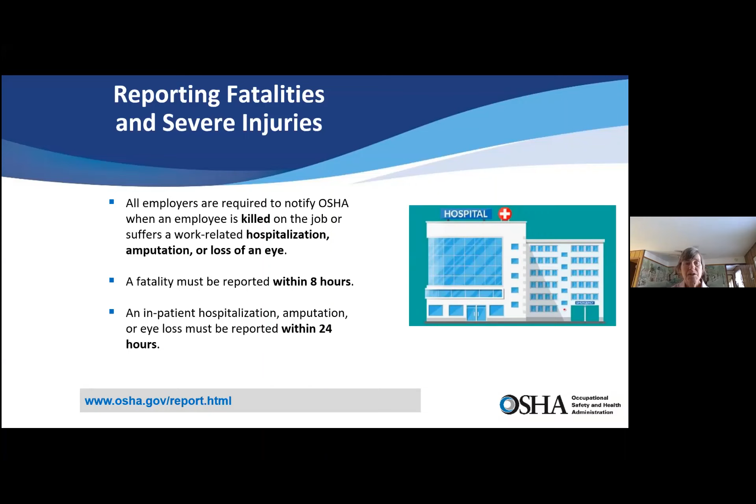...you have to report that, pick up the phone or fill out the online form, but you have to tell OSHA. The timeline is 8 hours on a fatality, 24 hours on a hospitalization, amputation, or loss of an eye.

You can do that during normal business hours by calling your local OSHA office. We also have a 24/7, 365 hotline that you can call, and they would direct it to the appropriate office.

Or you can do it online, which would give you a time and date confirmation that you reported it within the appropriate amount of time.

We are quite serious about the timeline, and it does expire.

I took a concern yesterday where an employee passed away in October of 2020, and the family member was wondering whether that was ever reported. So we do need to keep these things timely.

One of the things we look at when we talk about getting to inspections, besides the reported accidents, is what we call a referral.

This can come from local county or state inspectors if they're out on a site and they see employees exposed to a hazard.

Obviously not your most trusted source, but a company was doing an expansion and was really proud of their expansion work, so they took a picture of the contractor.

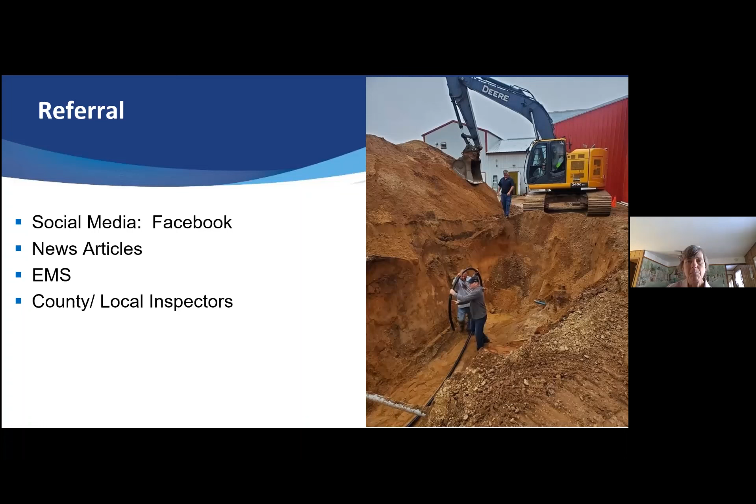So there's a number of things we would have looked at had we done the inspection, but we did address it in some manner by making the employer aware that we know they need to be doing a better job, even though because it was after the fact, we can't cite off of other people's photos. Not to give you secrets on how to get away from an OSHA inspection, but if somebody's out taking photos and everybody's got cameras, that is something to be concerned about or aware of.

So how we get to sites, first thing is an imminent danger. This trenching emphasis program, our agency priority goal, has elevated trenching to the point of if we see a dirt pile, we'll stop. You can have the trench box, have your spoil pile under control, everything else, we'll still stop. If it is all under control, we say, thanks, have a great day, appreciate your compliance, and we walk away. If it's not in compliance, then the inspection would be initiated.

Other imminent dangers would be if you had people on the roadway without proper road markings, so your traffic control isn't adequate to protect the employees. If you had people in fall distance, so typically in the imminent danger, if we see somebody on a roof without fall protection, that's where we would stop. But in trenching, if we see a dirt pile, we'll stop.

Our second priority would be the fatalities or the report of serious injuries. So this is after something happened. That's why we try to get there before, in the imminent danger. If we get a reported case, then we will go out, and that's prioritized over an employee complaint or a referral.

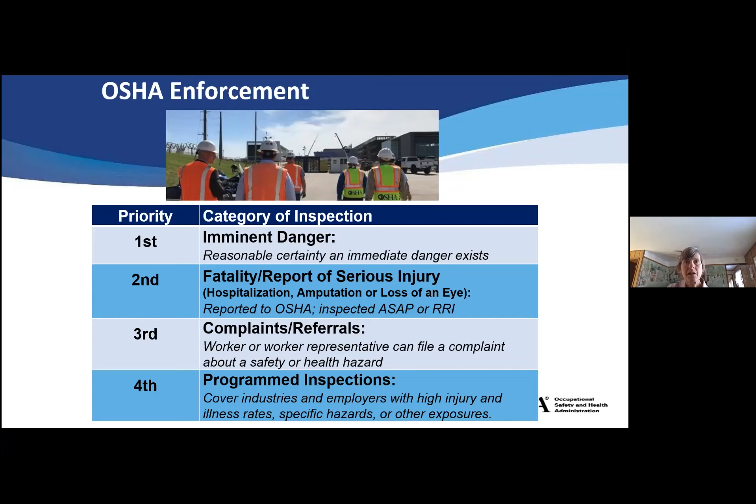We do programmed inspections, and so for construction, that would be larger projects that have some sort of duration, more than a dig a trench, put a water line in, and walk away. So those would be hospitals, schools, big utility projects that are let bid, usually government contracts.

So what we do once an inspection is initiated is present credentials to the employer. And if you have a lead person on site, they are acting as the employer. They're directing activity. Therefore, we consider them an extension of the employer, even though they don't own the company. So if you do have someone who's in charge of your crew, and you do have an OSHA inspection, just kind of let them know how you would like them to handle it.

Usually, we do not have the ability to wait, but they could call you and get you to the site if you're out bidding jobs or doing something else. But we do need to initiate the inspection. And once we initiate the inspection, we need to keep proceeding. So we do have credentials. If you suspect that the person's false, not really with OSHA, you can always call the area office.

We have what's called an opening conference. We discuss the parameters of the inspection, which would be the reason why we're there. We have to have a reason. If anybody deals with MSHA, they have the ability to just stop at a site and do an inspection. We have to have a reason, and we'll tell you what the scope is. And generally, these sites are everything we see, everything that's there. If we were in a major manufacturing facility, we may limit it to one department, depending on the complaint item or the reason why we're there.

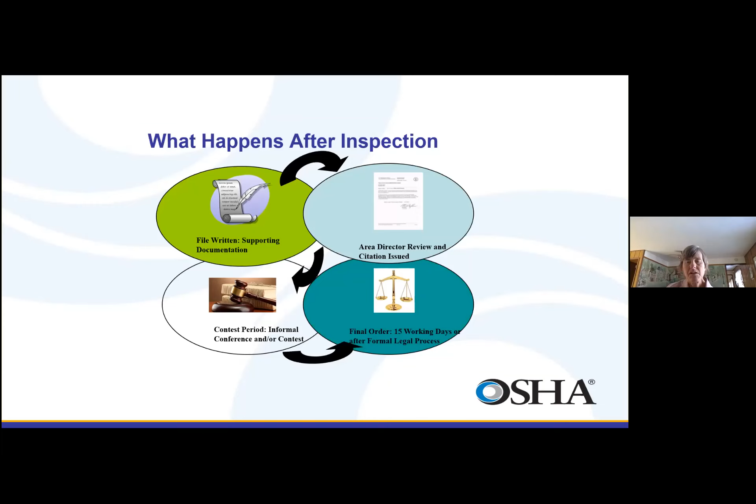But here's one of the sticklers in what's happening in the OSHA world: we're 50 years old. We had one penalty adjustment in the 90s, and the second time we adjusted penalties was 2016. The 2016 adjustment said we shouldn't go that long between adjusting. We'll just have the penalties adjusted for inflation. So it could technically go down, but with the inflation rate, especially at the end of 2021, the penalties went up $849. And typically they've been right around $150, $200 every year. They've been inching up. It took a big leap. So in 2023, that's going to be a huge number. And those are per item or per violation, depending on the category.

A lot of construction companies, a lot of people that have a lot of visibility are really concerned about the repeated classification. And a repeated violation is a standard that's been violated within the past 5 years. So if you think of your driving history in 3 years and you go, oh my God, when's that ticket going to drop off? You have 5 years for that item to be available as a basis of a repeated violation. And that $145,000 is a very significant number.

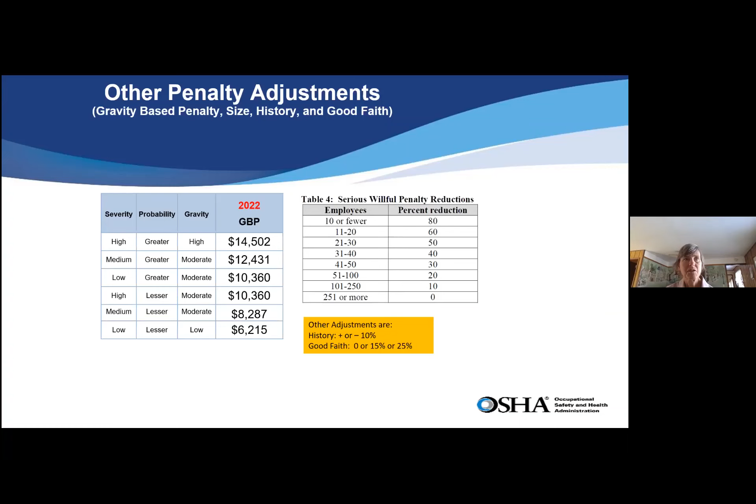So the penalties have gotten significant enough where I think people are understanding that sometimes it's better to take a step back and reconsider what you're doing, because for $14,000, you could probably wait until the next day until things get sorted out on what would be the safer way to proceed.

One thing OSHA can do is called the multi-employer worksite policy. So we have utilized this quite a bit. If you do a large job and it has a general contractor, they will ensure that whatever you do is done safely, because they could get cited for it. So they'll point out things that you need to be doing better and not exposing the whole group to.

The city, county, if you're a county inspector, your group that controls your safety is the Department of Safety and Professional Services, and they do have a group that does inspections for your entity. So you could be exposed to a trench that somebody else dug, and if you got buried in that trench, OSHA wouldn't have jurisdiction. It would be DSPS.

So there is a division there, but you do have people that you can call and talk with, try to get the program together and means and methods of acting safely. The other thing that you can do is you can submit a referral to the OSHA office on the contractor if there are issues. So where we've used the multi-employer worksite policy, this was a number of years ago up in Elmina, up in my area.

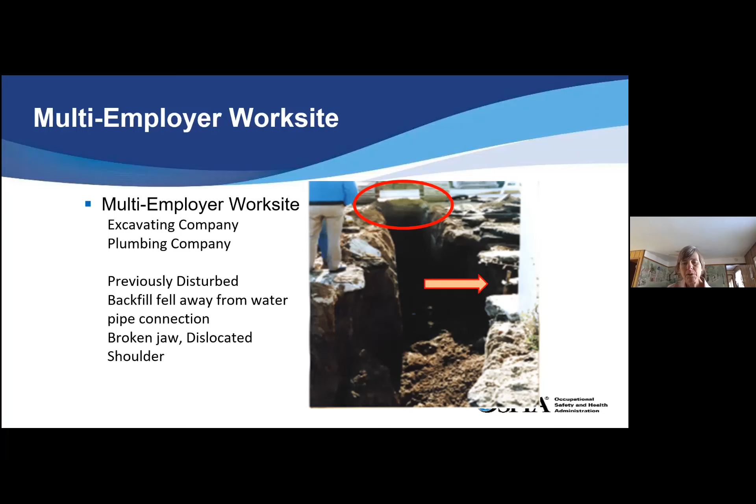We did cite the excavating operator and company, and then the plumbing company for that, because one created, the other caused. So I know a lot in the way my dad's business ran is, he didn't have an excavator, so he was relying on the digger to be doing their job, and sometimes talked about putting up with stuff that he didn't care for. But you have to have that working relationship with your excavating contractor of what you're going to accept.

We used to have an office in downtown Eau Claire. We got the best photos. I was just across the street, riding buckets, doing stuff like that. If that's a plumbing contractor and that's the excavating company that's allowing him to ride the bucket out, there would be 2 violations there.

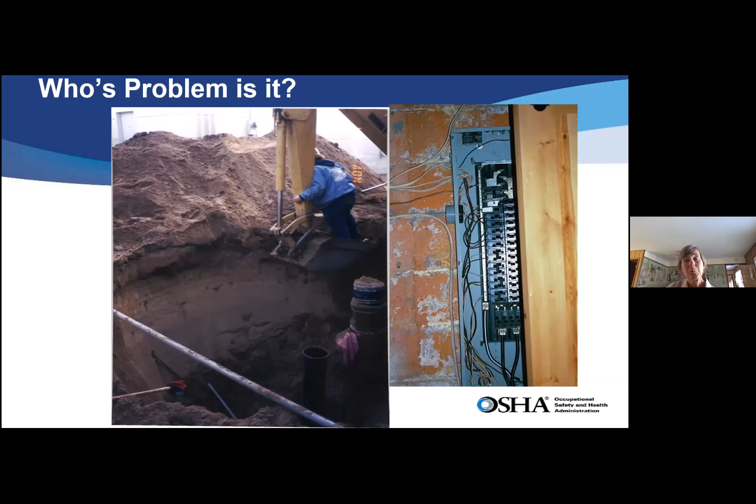A lot of times in regular construction, we see the electrical boxes open and they're energized. So to imagine, I opened that door and was like, that's live.

So we can cite who created the problem, who has exposed employees to the problem, who is supposed to correct it, and who has oversight. That has cleaned up a lot of the construction industry quite a bit.

Okay, getting to the trenching itself. There's a lot of posters, there's a lot of initiatives out there, but when you put machines on the edge of that trench, you're creating a mini earthquake. All that vibration, all that movement is adding to the stress of that wall. The spoil pile needs to be 2 feet back. Any trench deeper than 5 feet needs to have some sort of protective measure.

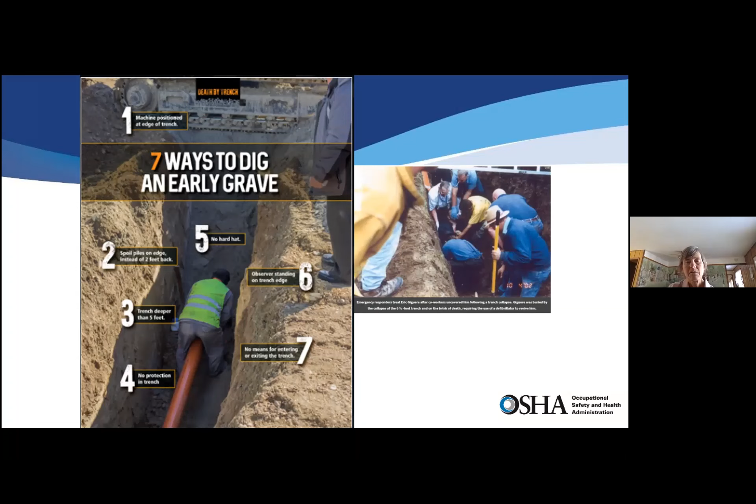And no hard hat on there. An observer, that's probably not the biggest thing, but if that wall gives way, they're gone. And then they need a means of getting in and out of the trench. Often what happens on the rescue side is they're usually recoveries rather than rescues, and you can YouTube a number of things and see people trying to dig people out with the excavator bucket. You just cringe if somebody's buried. It puts rescue groups into a very difficult position.

The other thing we look at in trenching excavation, it's not so much unless you're doing pit work, but you can have a hazardous atmosphere in which you could be overcome by the gases. We had 4 people overcome in a pit in 2007 in Superior. It was a landfill leachate pit. Guys had been working in there for several hours, and then one guy collapsed, his brother went in, and then somebody else went in, and the 4th guy told the 5th guy to go call 911, and he went in and he didn't make it out either. So we want to make sure we look at.

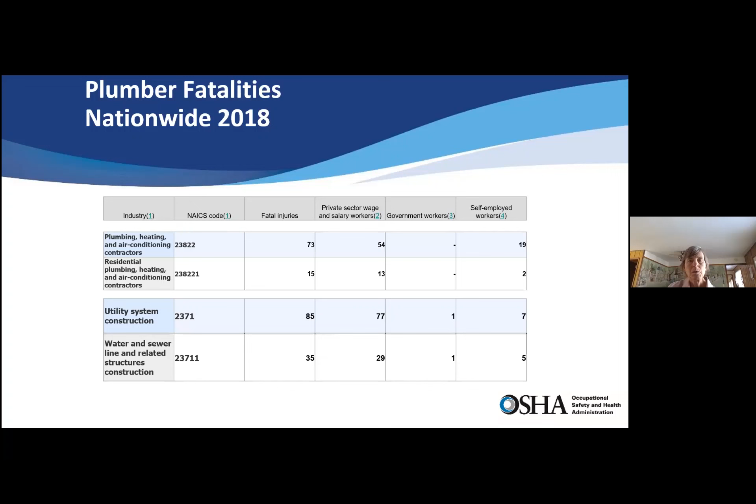Hazardous atmospheres - so I didn't update this one, but it just shows that plumbing contractors, there's a number of utility fatalities that do occur, and it's something to be aware of quite a bit. Self-employed is another number they track, and if you're a small business or your own entity, it is very possible to get killed in your own work or your own trench.

Okay, so for the things that we do cite, again, imminent danger and things we see from the roadside create a lot of the stops or inspections for construction. So we see people on the edge of the roof. We can't see if they don't have a ground pin on their extension cord from the roadside. So fall protection is always going to be on this top list. Eye and face protection, get your hard hats. But number 8 is the trenching issues and concerns.

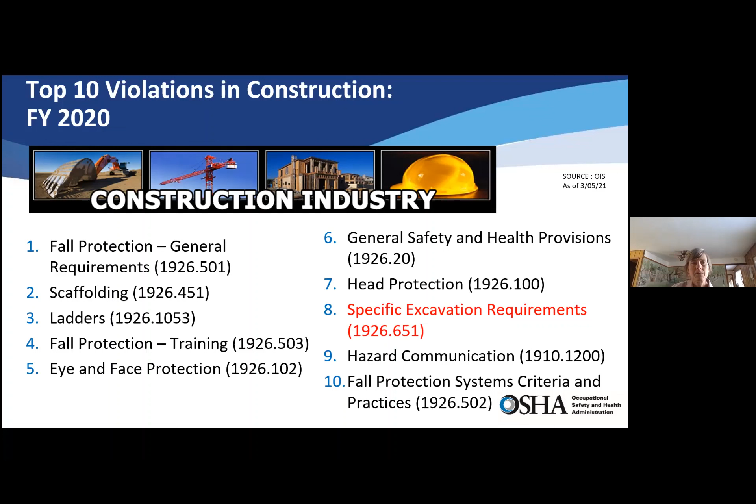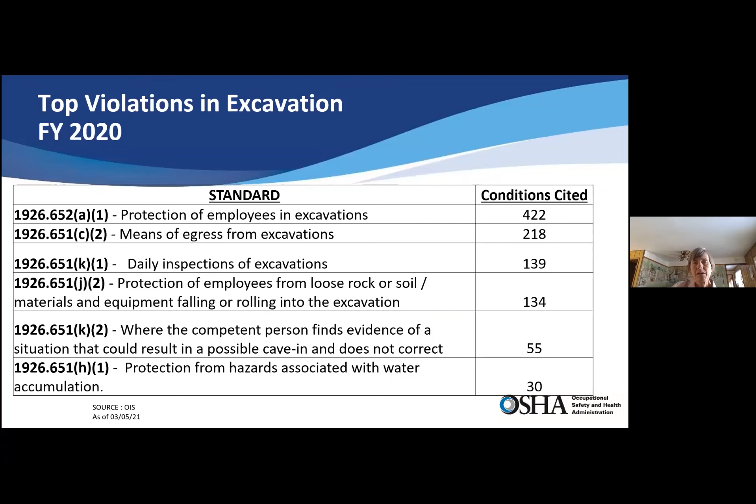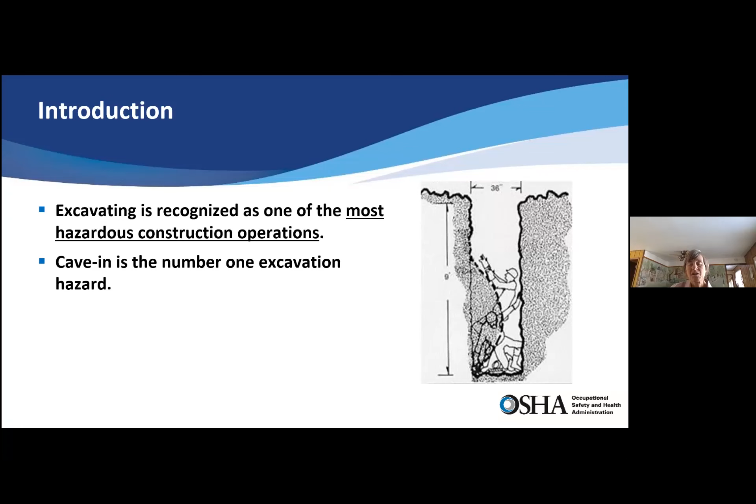So when we look at each specific trenching violation, it's protection, not having adequate protection, not having a means of egress in and out, not having daily inspections - that's your competent person - the 2 feet around for the spoil pile, another competent person variation, and then protecting from water. So it is cited quite a bit throughout the nation, and it is something we are looking at. It's one of the most hazardous construction operations, and cave-ins are the number 1 cause of the issue.

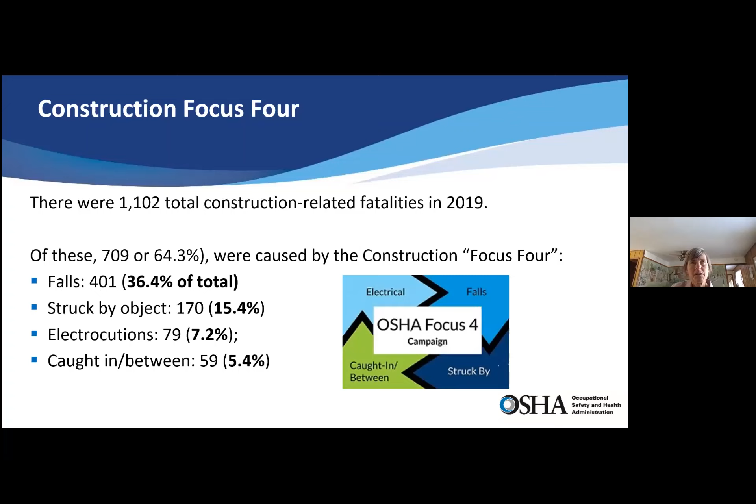So something that we think about in construction is what we call the focus 4. These 4 items contribute to nearly all of the fatalities or serious injuries: falls, struck by, electrical, and caught in between. So when a trench wall collapses, we call that caught in between the trench walls. And struck by could be hit by the excavator's counterweight.

I don't do videos when I do virtual because it's a curse of death, but this is something - for some reason somebody was videoing this, and they were clamshelling out the area, getting below the concrete ring, and the guy in the pink shirt - when they removed the soil, the replacement soil came from underneath his feet, and he got sucked down in there. The guy in the gray shirt grabbed onto the clamshell, and that's what saved him. But the guy in the pink shirt didn't make it out of there.

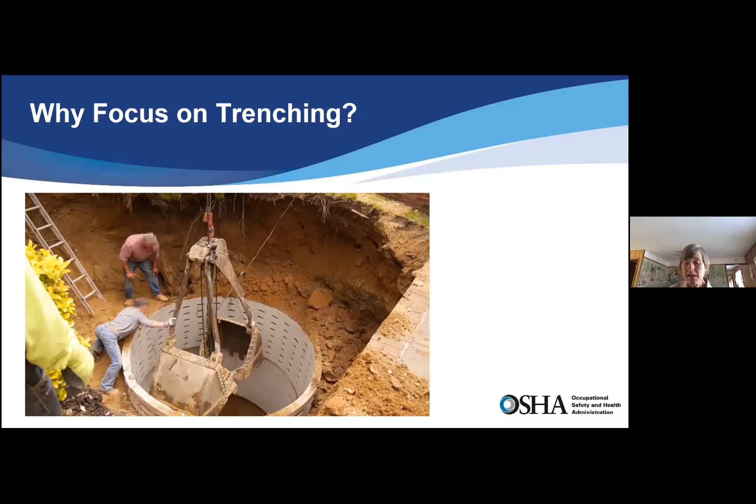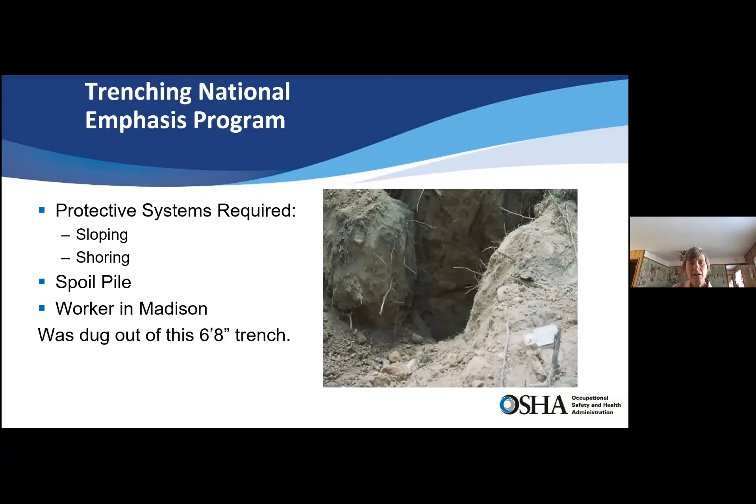Here's another accident that we investigated in the Madison office. It wasn't that deep, 6 foot 8 inches, but it was also for a septic tank application, and just a little bit came in. The worker was injured, but he did make it out.

This was a fatality in the Eau Claire area where the sidewall collapsed - it was a water line they were putting in. It was a pre-existing water line, and the dirt fell away. It didn't totally collapse, but it was enough to kill a young individual.

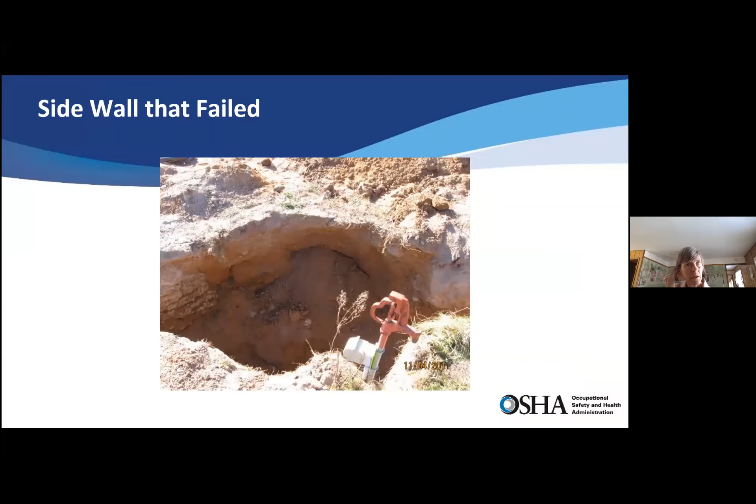So when we look at our trenching fatalities, and the reason for having this emphasis program is that we had 17 - that's 17 too many. And then we popped up to 36, a whole big number of fatalities. So we've been on this, getting this agency priority goal for a couple years.

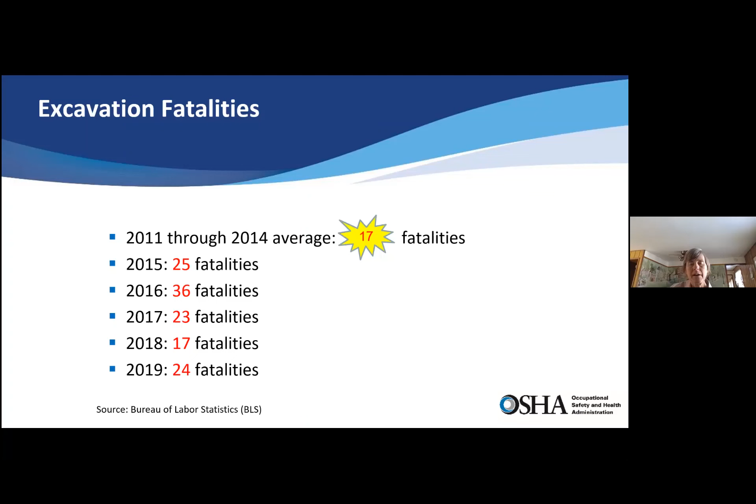Hopefully we're seeing a trend down. I know that we saw 0 trenching collapses in Region 5 in 2021. So I call that lucky - I don't say that we did all this great initiative. Hopefully people are doing a better job and taking it seriously.

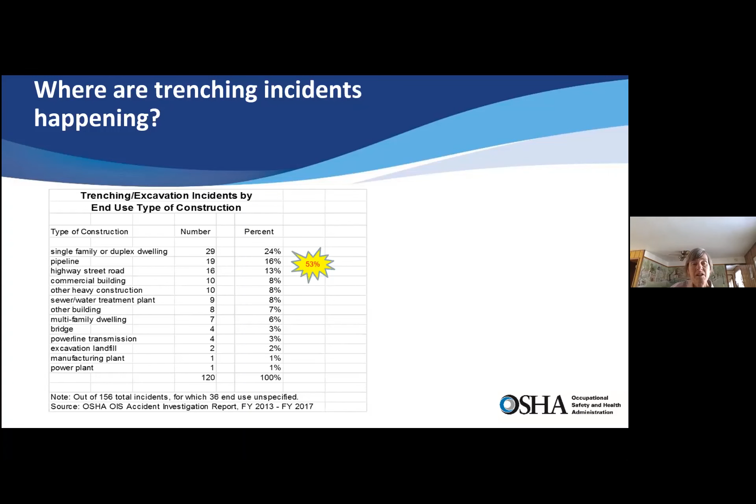So single family dwellings, duplex - 24% of the fatalities are coming from that area. Pipeline, road work - 53% come from that area. So single family dwelling and septic tank work is the highest risk. So we have our initiative.

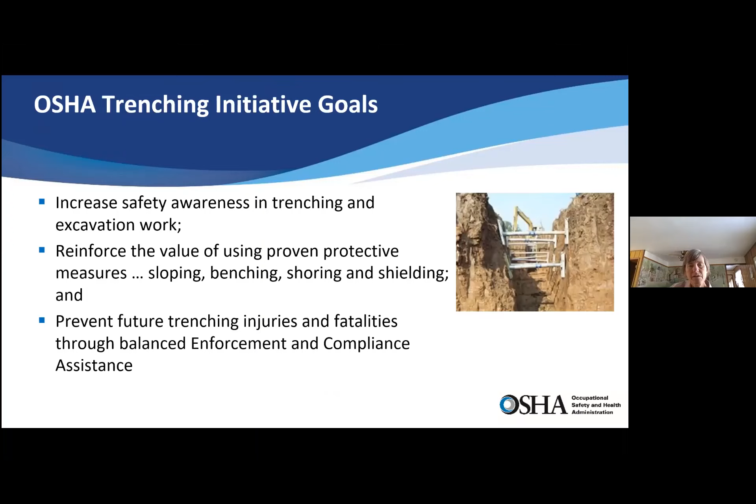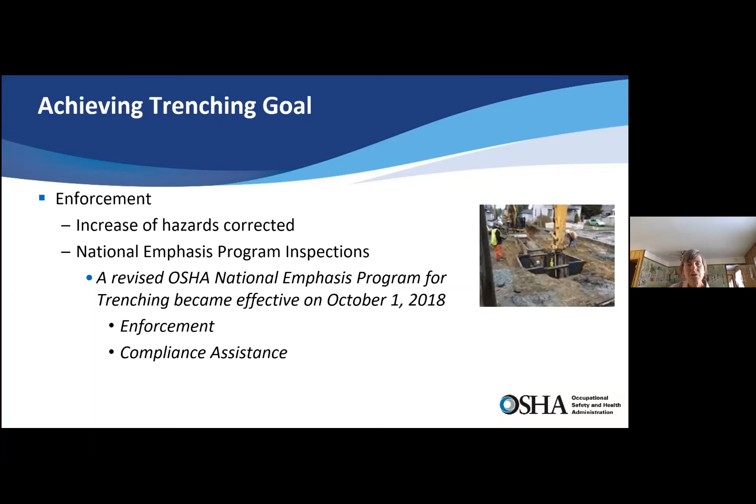We're to reinforce the proven protective measures - make sure you get some trench box, some shoring, some method that is preventing the collapse. And our initiative came into effect October 1, 2018, and it's enforcement, but also compliance assistance. So we've done a lot of outreach trying to get the word out on this.

One of the things we do in the month of June is work with other groups and associations, and we have trenching stand downs. So compliance officers and myself actually go out to trench sites, meet with the employer and the employees, and talk through what they're doing that day. It's by appointment - there's no enforcement.

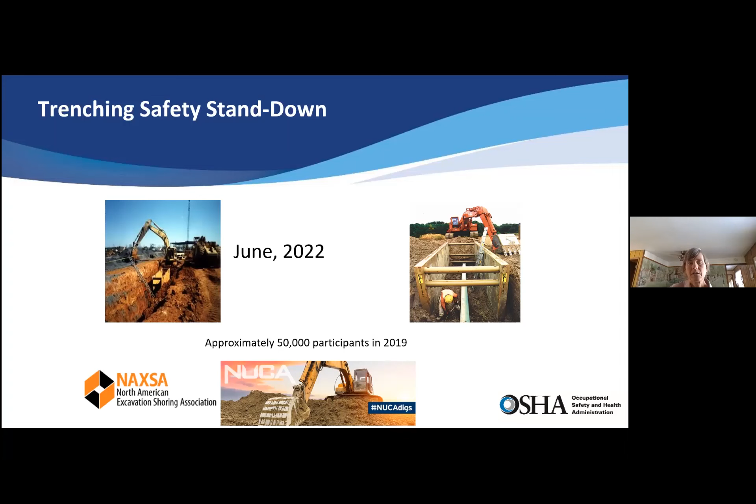It's really kind of a cool way of us understanding their role and how difficult it is dealing with anything underground nowadays, especially a city utility or city street doing utility work. You've got gas, fiber optic, anything electrical underground. It's just getting very busy under there, and you truly need to appreciate the work people do.

So our mantra, or what we came out with, is 5 things you need to know to stay safe. So if we were to ask employees in their interviews, well, what do you need to do to stay safe - if they could name 3 out of 5, I think we win. Sometimes I have to think them through.

Make sure you have a safe in and out, make sure the trench is protected, keep the materials away from the edge, look for standing water or other atmospheric issues, and don't enter unless it's inspected.

So the first one, safe in and out. You have to have a means of getting in and out every 25 feet. So a ladder - and a ladder has to extend 3 feet above the trench for every 25 feet. And this requirement starts if the trench is deeper than 4 feet.

A lot of times if you have an electrical trench where you're just standing in there, you know, your butt's on the edge - it's really not deep enough to put a ladder. You don't need a ladder in that case.

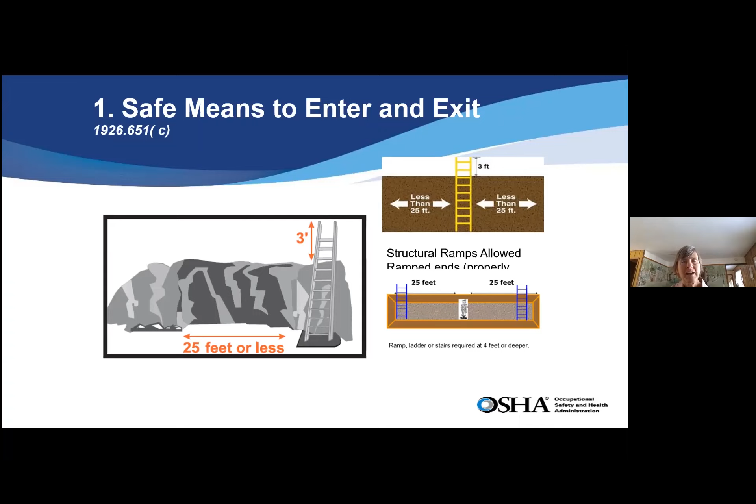The other thing is, if the excavator operator leaves you a ramp at the end where it's sloped up where you can walk upright, that's considered an exit. So if you have to use all 4s to get up and crawl out, it's not sufficient. If you can stand up and walk out, that's considered one. So every 25 feet, make sure they extend 3 feet up.

This is the one that was cited the most - cave-in protection. Surprised they didn't put this as number 1, but this is their numbering system. So sloping, benching - you can't bench Class C. Almost all of Wisconsin is Class C unless you get up to the Lake Superior area.

You don't have that much room anymore in this world. If you're in somebody's backyard, they have bushes, trees - you've got all kinds of things you're not able to dig around. So sloping has become less and less of an option unless you're in a very brand new development where you have no underground obstacles, no overhead, no sidewalks, no buildings to deal with.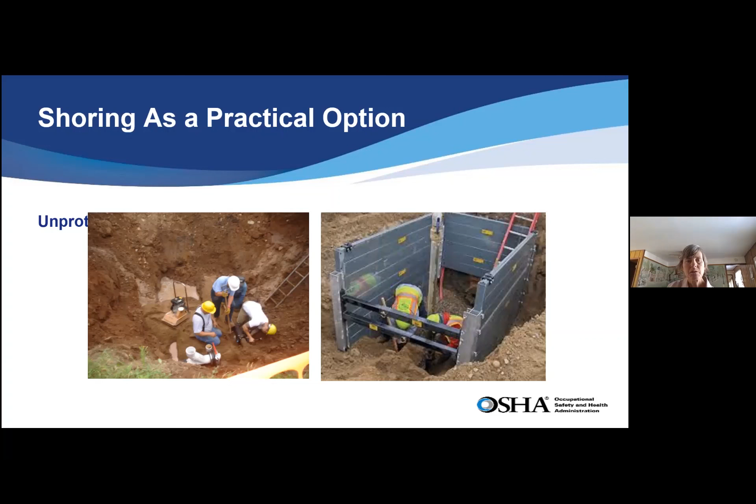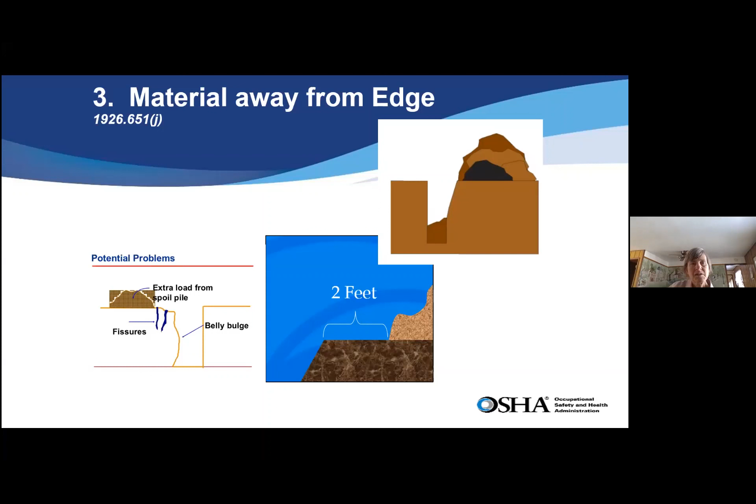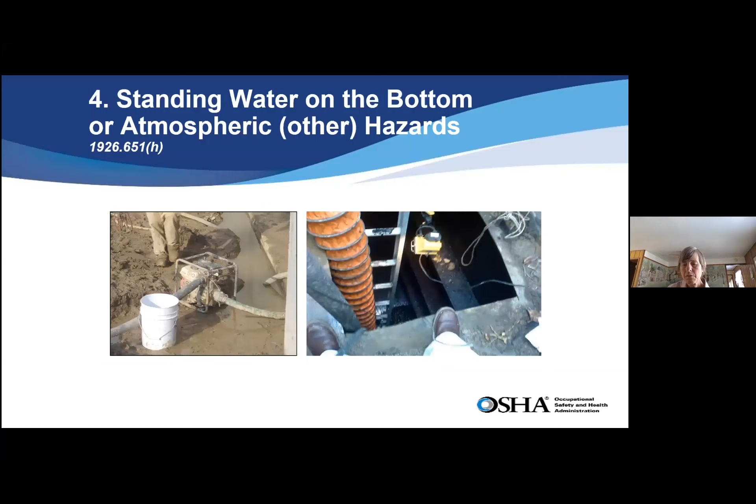Some of the easier stuff, keep everything 2 feet or more away. That extra weight on the edge of the trench can cause it to collapse. You might have rocks on the top of the pile that might start to tumble down and take the direct route into the trench itself. Plus, a lot of times people need to maneuver around the trench, that gives them a walkway to do so. Standing water, try to make sure you've got some pumps or some system to remove the water if you need to be working in there, or let it drain.

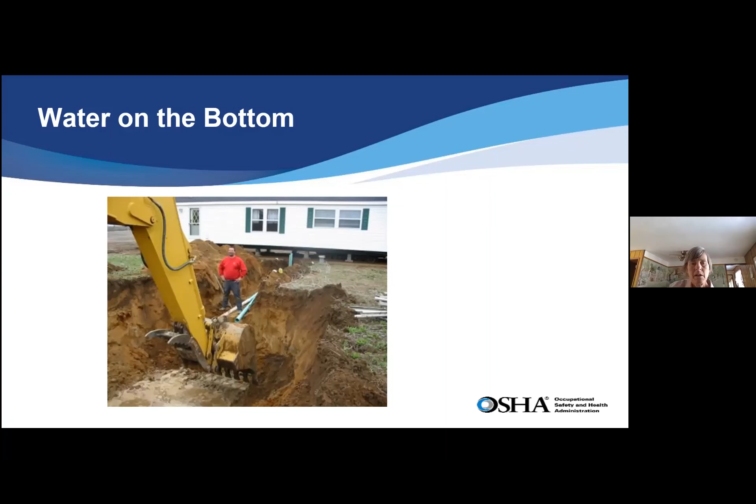So we talked about the depths. Where the guy is, it looks like it's at waist deep, so he really wouldn't need ladders if it's less than 5 feet and he deemed it stable. He wouldn't need a protective system. But getting down into the hole that they're digging into, that's definitely something that we would look for exits, shoring, protection, and getting rid of the water accumulation.

Make sure everything's inspected. This is where the term competent person comes in. A lot of people know what a trench should look like, they have information, you soil test it. Soil testers can tell you exactly silty loam and class C or B or whatever. But the true test of a competent person is the authority to immediately eliminate the hazard, and that comes from the employer. So if the employer says, get it dug, I don't care how, it has to get done by 4 o'clock, and the competent person just says it's got to get done, they aren't competent because they can't change or correct or eliminate the hazard, stop the job, because the employer hasn't given them that authority.

When we ask competent people for their requirements, it's have specific training and knowledge. It really isn't any one thing, it can be previous experience, it can be knowing what the different protective measures are, kind of like an accumulation of a resume. So any courses that are taken, there is competent person's training for trenching that is an actual course.

If you took that, that's certainly good information to support the fact that this person could be your competent person.

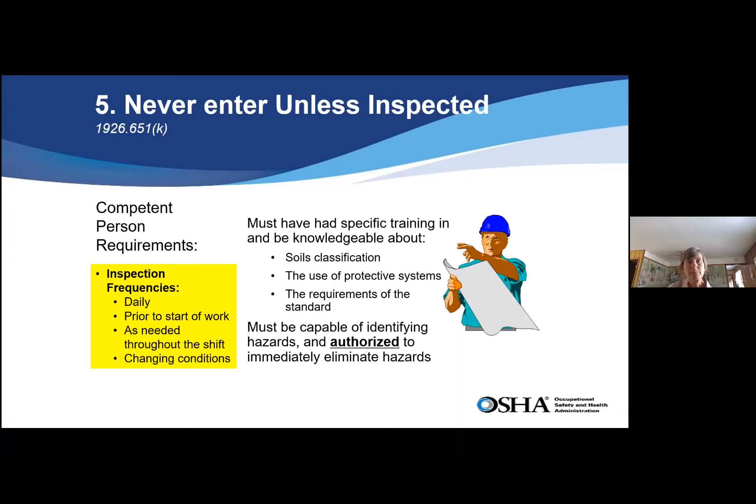So make sure you have a safe way in and out, make sure it's protected from cave-ins, make sure you've got enough material stored away. Watch for atmospheric issues, and don't enter a trench unless it's been inspected.

So sometimes we talked about social media. I was going on people's websites. So the guy is like, I provide the plumber with a neat workspace to complete the hookup from the house, and they're trying to promote that.

And it's like, well, if you're down on your knees right down there, that could certainly collapse on you. You can see the tight space where you would need to be able to use some sort of shoring, but you certainly couldn't slope that out to the standards requirement.

The ladder in the trench needs to extend 3 feet out. So taking a lean-up 4-foot ladder isn't sufficient in that case.

Spoil pile is back, so it isn't that bad. I just grabbed the stat, I know it's from 2000, but Texas had over half of their fatalities in trenches that are 5 feet or less.

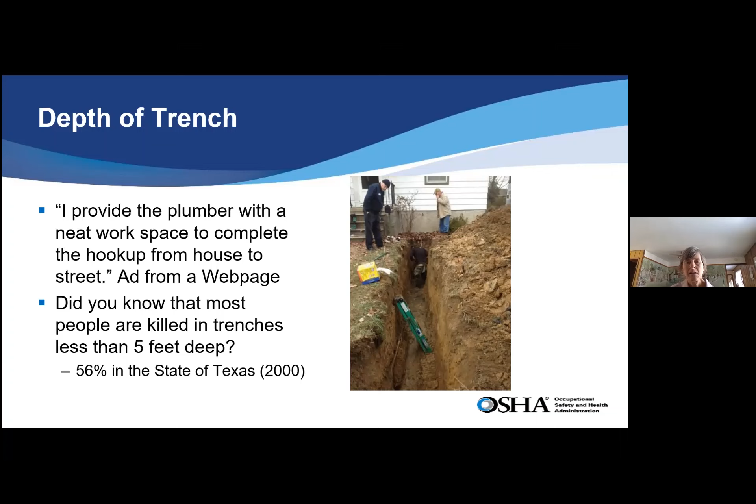And you have to remember, you're working on your knees, you're bent over. Any dirt coming into the trench is going to hit your head and neck and affect you that way.

So I was doing a presentation, and we were able to set up this little display, showing the amount of dirt that you'd have to move. So we're showing 1-to-1 on the left side.

So for every foot up, we went 1 foot over. And we're measuring from the 2x4s out, not the center of the trench. You can see how much dirt has to get moved versus the center line there that has just the bucket width.

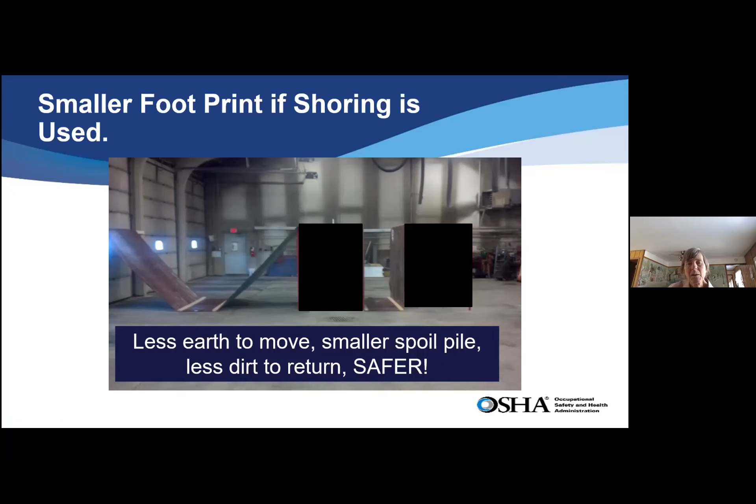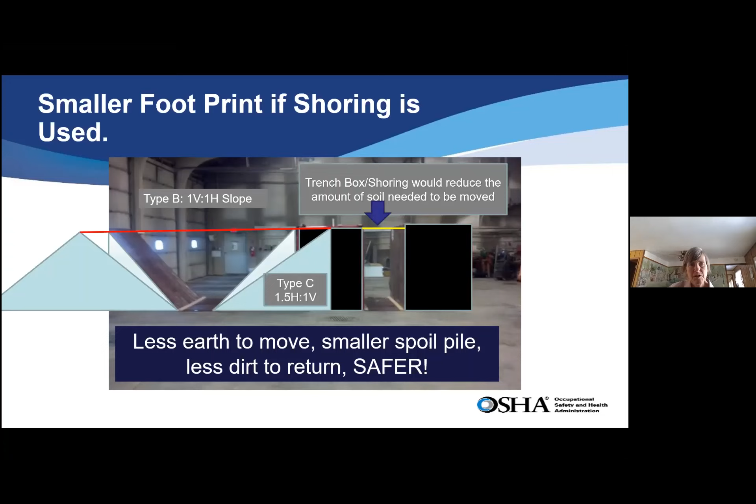Or 1.5-to-1 would be even farther out. So that's a lot of dirt. There's not that much space to work with in people's yards, or once you start getting into city streets.

We'll talk a little bit about confined space entry. We do have a compliance guidebook. We did implement this in mid-2015 or something like that.

And it does follow a lot of what general industry has, but it is very procedural-minded, and you need to have all the steps to make it effective.

But the ladder wouldn't fit down. And if you put the ladder in that hole, you couldn't climb down if you were a normal-sized person, because there just isn't enough room, since it cuts the hole in half.

So bad planning. Again, some of these are dated, but you do find a couple of them every year, where people work in an underground septic system and felt weak, passed out.

Sometimes if somebody tries to rescue somebody in a confined space, they are likely to be overcome too. In this case, the person was pulled to safety.

This one was 2 people, one went in, the other tried to help. Hydrogen sulfide is a lot of times the culprit, and sometimes it's methane, but hydrogen sulfide gets trapped in sludge.

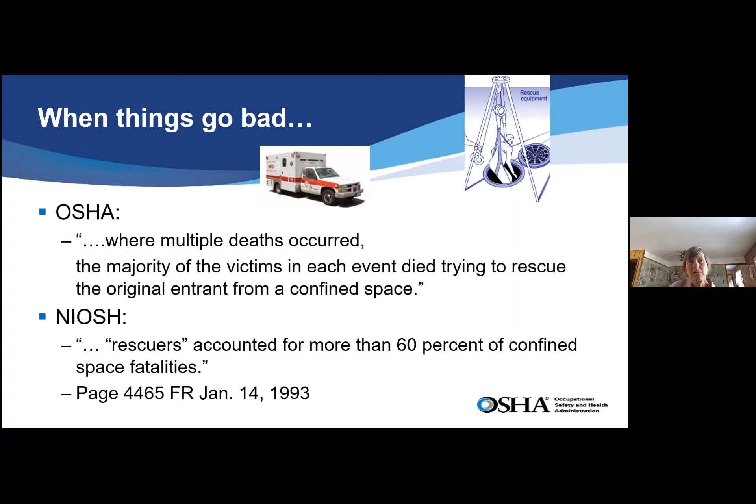Even with a harness and a lanyard, a very strong individual cannot pull a 150-pound person, complete dead weight, out of a hole unless they had some sort of mechanical device. Again, they had the 4 people that died in the Superior landfill.

So what we're looking to have people do is eliminate the need to go into spaces. Don't be there unless you have to. Retrieve samples remotely, remove components, pull pumps, bring stuff up to the surface, do the repair, put it back down. There's a lot more camera work, looking with mirrors, doing stuff that way.

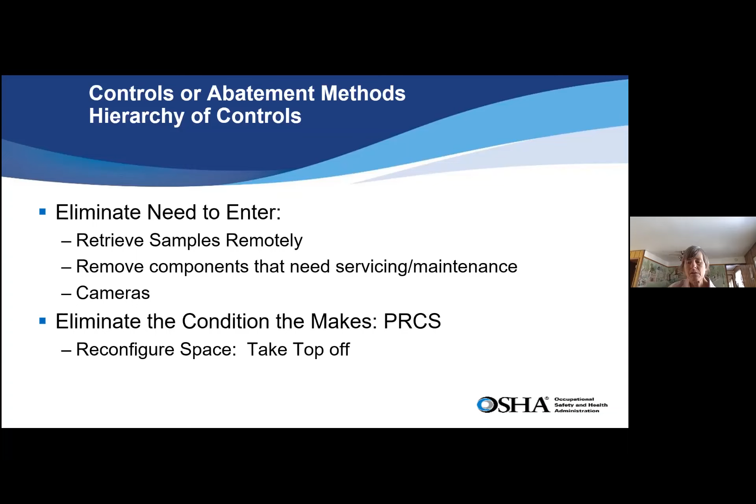Sometimes we can reconfigure the confined space. So if you have a septic tank, if you take all the dirt away and take the entire top off rather than just the manhole, then you've reconfigured it. It's no longer a permit required confined space. So again, there are a lot of little tools you can use.

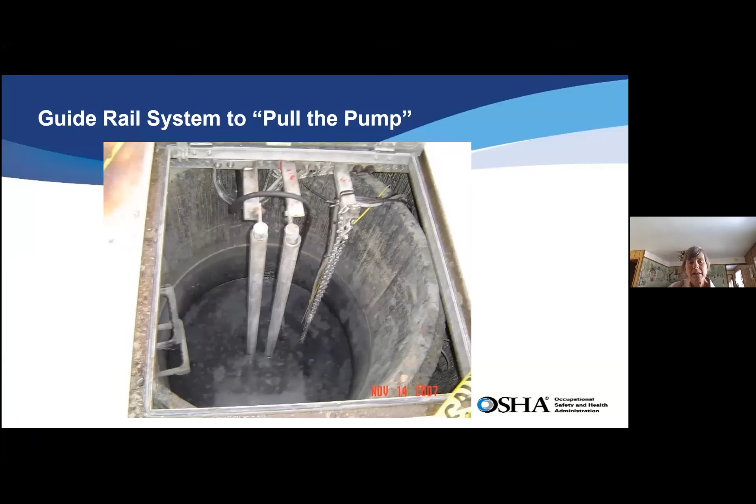Don't accept the work unless you have the ability to do it correctly. In the case of Superior, the guide rail system was installed after the fatality. It was supposed to be in place before, and that would have allowed them to pull the pump, repair it, and drop it back down. That would have been easier than crawling down there, and certainly the results would have been different.

In septic tank systems, there are a number of these units where you can just bring everything all the way up, change the filters, or the cap on the top. You can get a device, take that off, and there are tools you can use to put a new filter in if you don't want to pull it up, or can't.

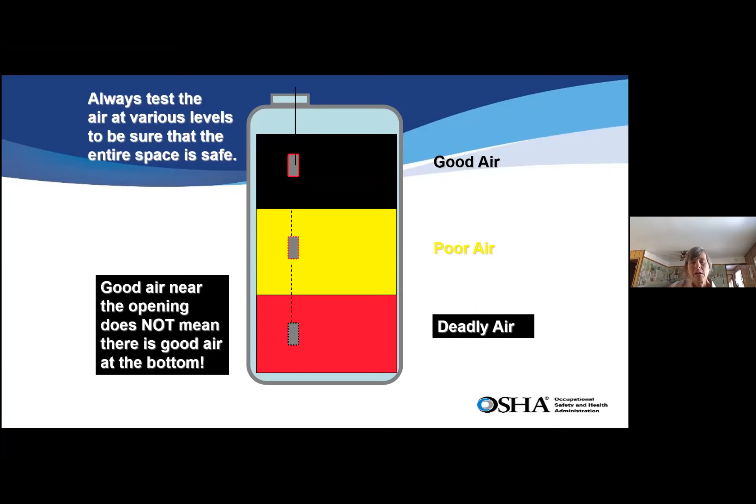Air testing is one of the big elements of confined space, and everything has different levels that they seek. Every gas either settles, is the same density as air, or is lighter than air. So when we do testing, we have to give the test, drop the meter down on a line, and be able to read the amount. The sensor gets dropped down with the meter, and you give it adequate time.

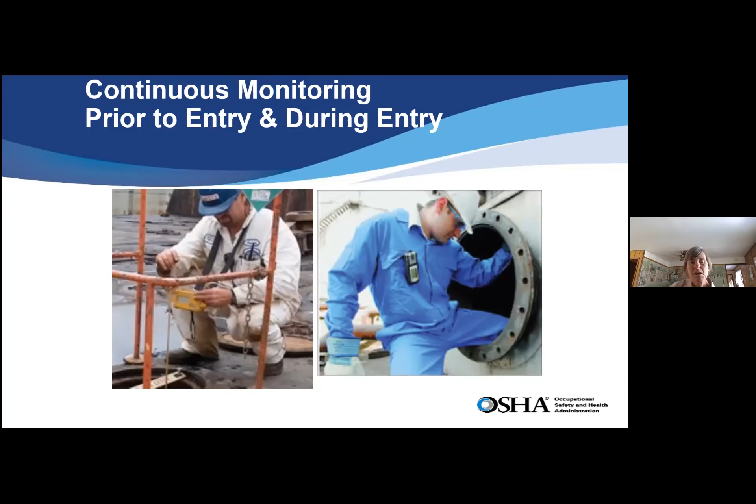Continuously monitor. There are a lot of different devices for gas meters that people use. You'll see it on a lot of construction workers, carbon monoxide meters during winter time. Any of your gas workers would have meters on them constantly.

How you ventilate things, everybody's got a little bit different theory on how to get the best ventilation, but when you get your readings, get some ventilation in there and make sure you're getting fresh air in.

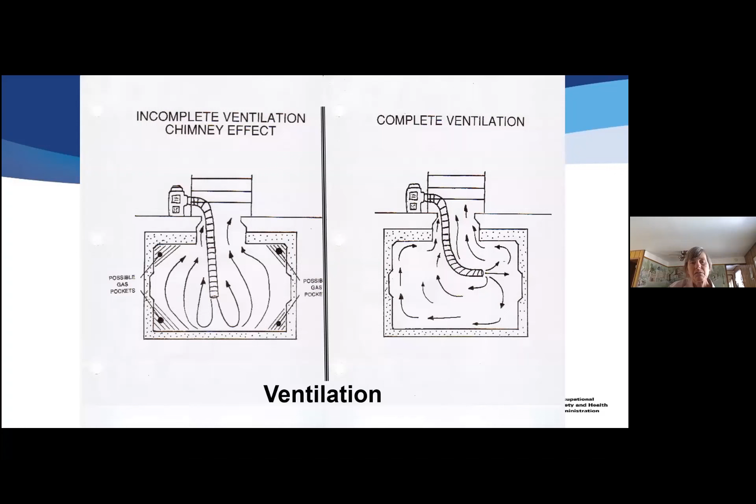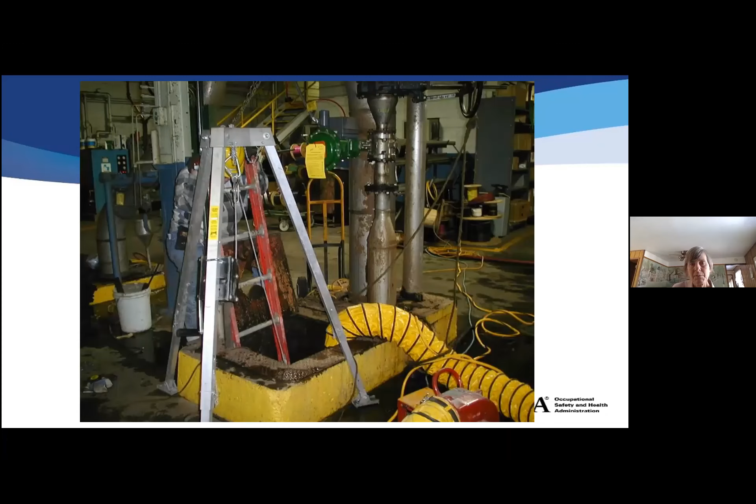So it does get really busy on your confined spaces. You have the ladder to get you down, you've got the retrieval system, you've got ventilation, you've got the blower to clear areas, and you have a standby person to make sure everything's happening okay. It is a process, and there's a permit that goes with it.

Just showing this, it looks exactly like the pit we had at our farm, with the person down there working in it. Anything down in a pit may appear dry, may appear like no problem, but anything that's got metal in it could be oxidizing and using up oxygen. The rusting process, you could have something dying or decaying.

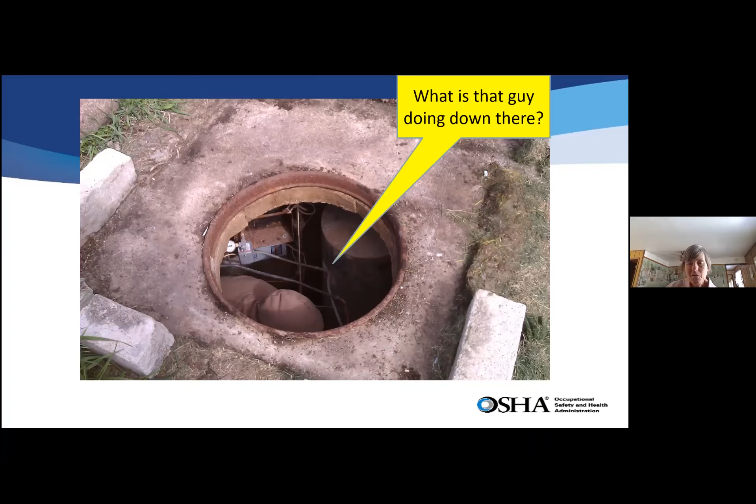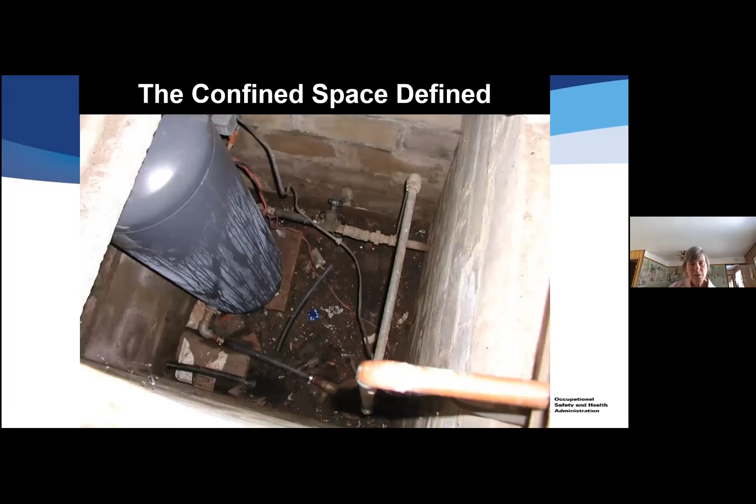Sometimes not having a mouse or something in there is a telltale sign that it won't support life. But it's something to be cautious about and aware of if you're getting down into these pits and doing service work. Hopefully they've been upgraded and removed, and things no longer need to be serviced.

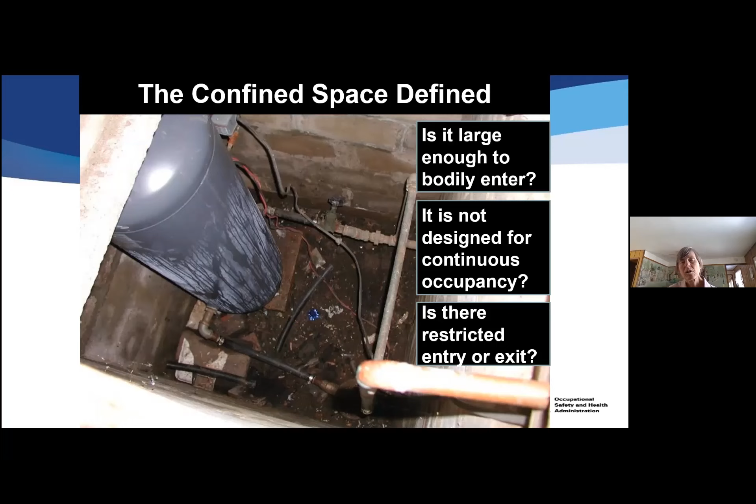So in the confined space definition: is it large enough to bodily enter? Is it not designed for continuous human occupancy? And is entrance and exit restricted? If you have to climb, crawl, or contort, that's what restricted entry and exit means.

What I usually tell people is, how many jobs do you do that involve septic tank work or confined space? Can you do those jobs without entering? How much equipment do you really need to purchase to do it safely? The retrieval system, having two people there because you need a standby person, having a monitor - there's a lot of investment into it.

So we sometimes call that a stranded investment, where the time and money won't pay back - you just don't have enough jobs. So sometimes it's cheaper to turn down jobs and have other people do the work who are equipped for it, and focus on the more specialty things that are more in your wheelhouse.

So even in trenching and things, best practice is bid the job, and sort of what everybody talks about is everybody's on the same playing field. If we expect a large utility contractor to have trench boxes, why isn't the person that's doing water and septic doing the same thing? The hazard's the same, and a life is a life, so you still have to protect people.

So as you get bigger houses, you might have unique settings. You might be getting into deeper trenches. There are some rental options depending on where you live that might have speed shoring or some sort of trench box. If that's a condition, you need a trench box, you're the plumber, make that a condition of your excavating company, because they probably have it for other jobs.

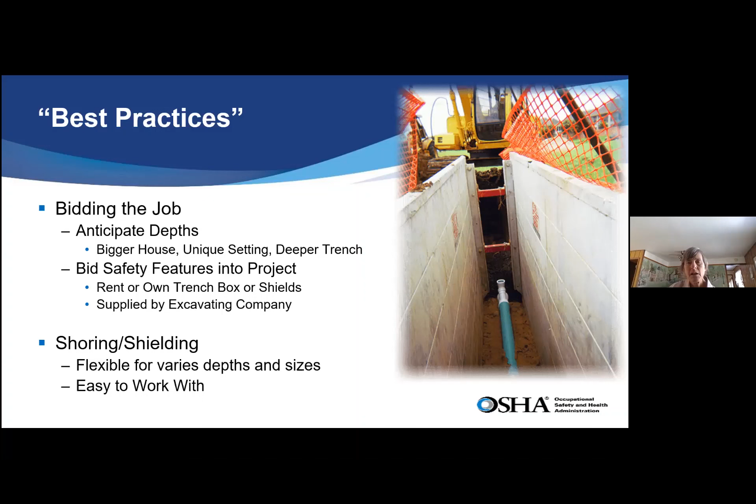And the speed shoring stuff is flexible for various sizes, depths, easy to work with. So you can see that you probably need to be a skinny person to get in and out of there, but the walls are supported and they're not going to cave in on you with that. And those are panels that you can haul in a trailer and not necessarily need a machine to put in place.

The other thing to be real concerned about is what's underground, also overhead, but the underground is the stuff that you have to hand dig if you get close to the marks. Get Diggers Hotline to mark it, and understand that they only mark the utility-owned lines. If it's private lines, they're not marked. You don't want to be the person that sets Sun Prairie off in an explosion and takes out the downtown and the fire chief and all the destruction that happened there.

Diggers Hotline is having some in-person meetings, and they're this week or this month primarily. They did postpone it because of the Omicron resurgence. And I know Stevens Point is tomorrow. I'm headed that direction. La Crosse is next week, and Eau Claire is next week. I am not going to the others, so I'm not real sure. Superior has one at the end of the month. There is one more virtual offering, so go to their website if you are interested in that.

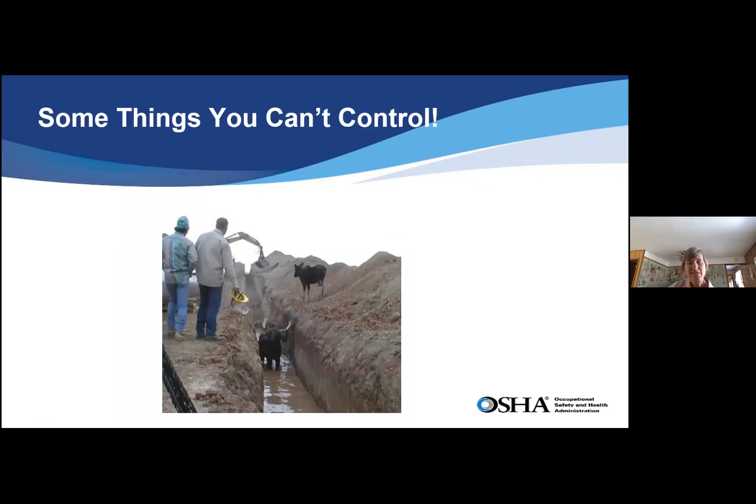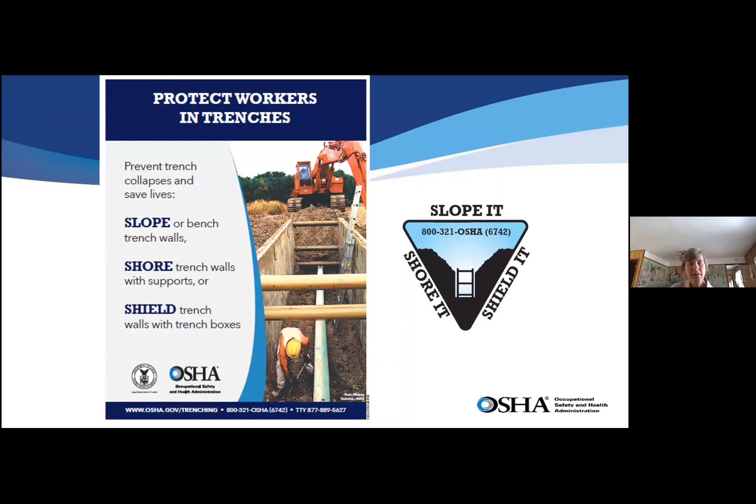So kind of wrapping up and doing the things that are available. We do have posters, we do have stickers, we do try to promote it, give you the 3 things you need to do. On our website, you can download the booklet, you get the quick cards. We do a newsletter every 2 weeks. You can get all the OSHA news. You can delete it if you don't like it. We don't track who it goes to. It is in Spanish too, if you want to work on your Spanish.

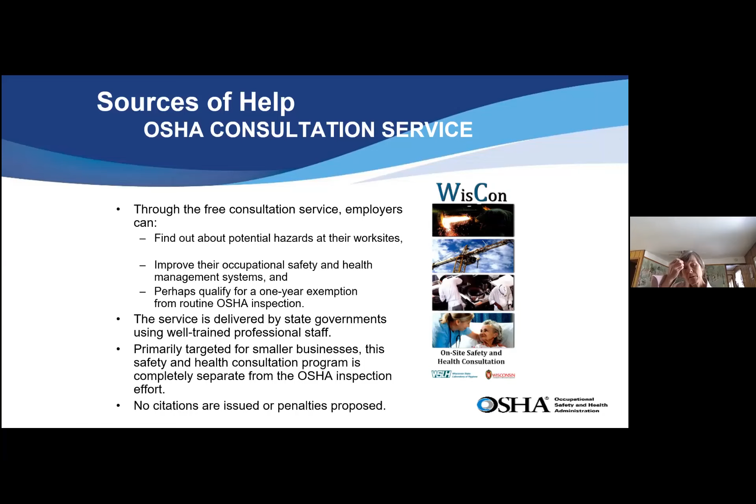Probably the biggest assistance you can have is the Wisconsin Consultation Service. And they are free to the employer who asks. Their only request is that you correct what they find, which may cost some money to make corrections. But it's like having a free OSHA inspection, and they're given the same training we are. They are confidential. They don't tell us where they've been. They don't have citations or penalties. So utilize their service if need be.